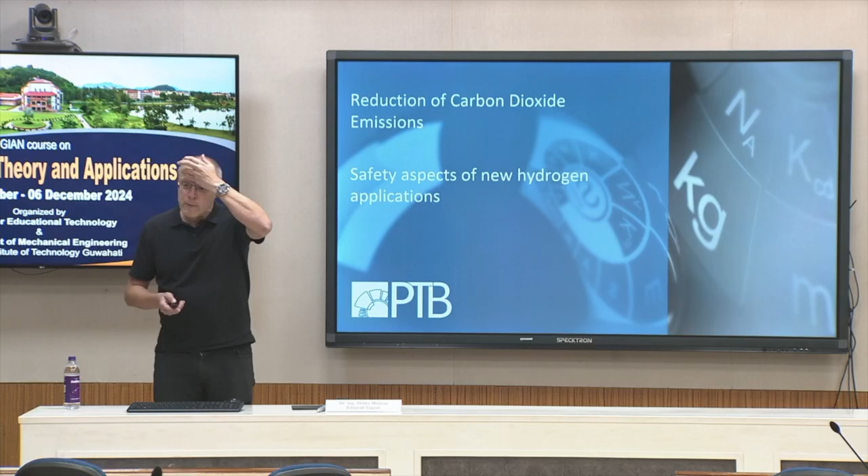In our today's session, we will leave the theoretical part of our lecture and will apply all the fundamentals we have learned in the last 7 days for some aspects. We will hear something from Professor Zahu about applications, and I will focus also on applications. So I will start today with the great goal, reduction of carbon dioxide emissions, and we will have one lecture about safety aspects of new hydrogen applications.

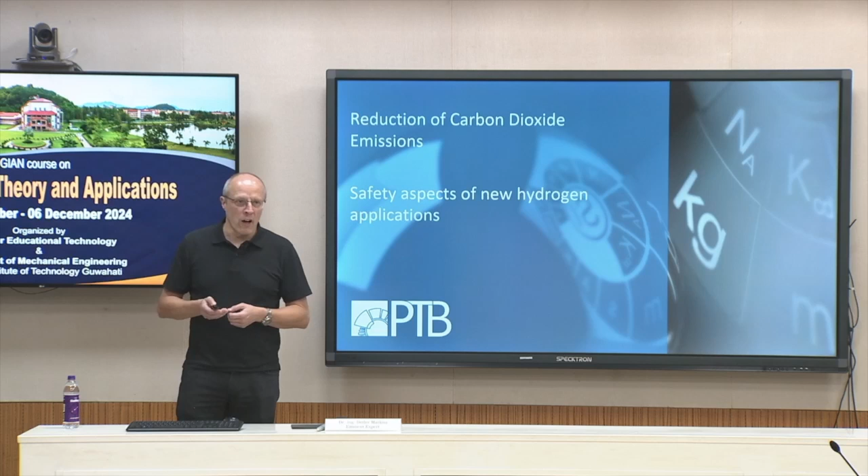So what is the demand if we really want to have a hydrogen economy instead of an economy based on fossil fuels? And I think eventually on Friday, depending on how fast we are, we will also discuss this topic, reduction of carbon dioxide emissions. So we may get rid of carbon dioxide, but if we still use combustion for energy production, of course there are other pollutants, and this then has to be discussed.

So for the motivation, okay, we have a climate change. This cannot be neglected. Maybe on Friday we'll discuss, is it man-made or is it natural climate change? So the dinosaurs lived in an era where we had no ice in polar regions, so it was much hotter on Earth at specific times.

But of course, there is a strong relation between the emission of greenhouse gases and global warming. And so the actual change in temperature globally is based on the emission of greenhouse gases. And this is not only carbon dioxide. Of course, this here you see has the biggest contribution. But there are also other emissions from agriculture, especially methane, which has a high global warming potential. Agriculture has a big contribution here. So all the cows in Brazil produce a lot of methane,

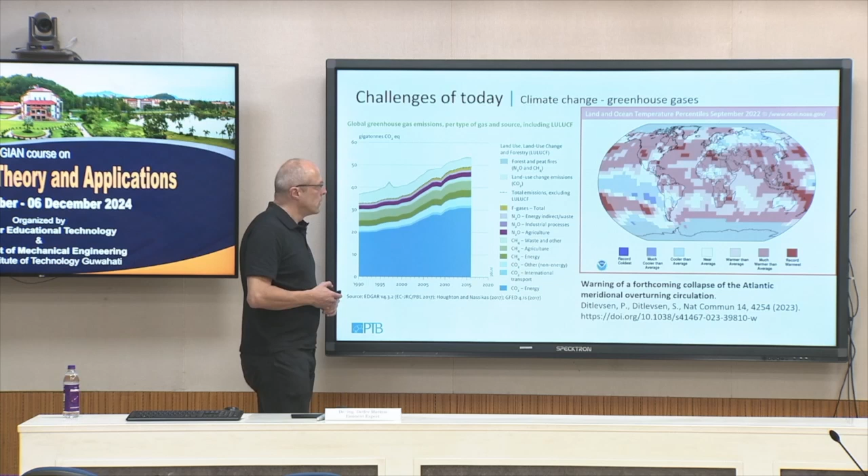which then of course absorbs radiation. We have here nitrous oxide, mainly from agriculture nowadays. But if we switch to an ammonia economy, this can change, of course. We can have much more emissions here. And here we have the F gases, hydrofluorocarbons. These are most often refrigerants, so used in our air conditioning systems.

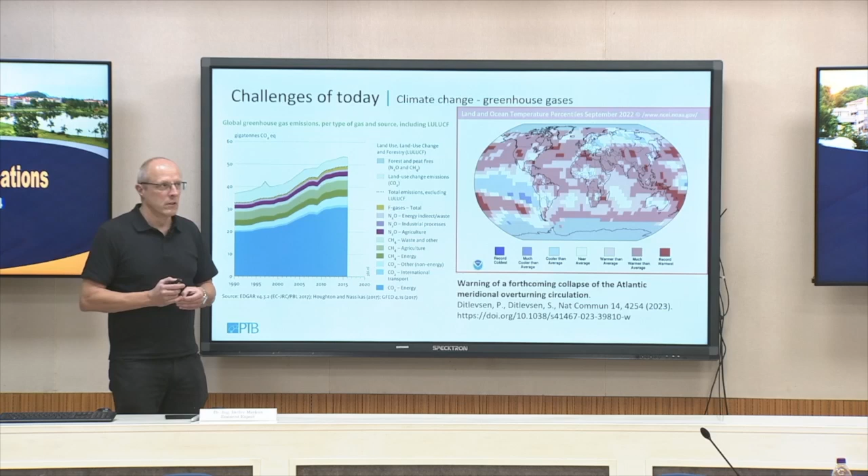They were introduced to replace the older refrigerants we had in the past, where we had some problems with ozone depletion. Now we have some refrigerants which have a high global warming potential. And there's of course a ban on these gases, but when we look at the worldwide demand for cooling systems, the demand here will strongly increase. And the question is, will the contribution of these gases to the greenhouse emissions also increase or not?

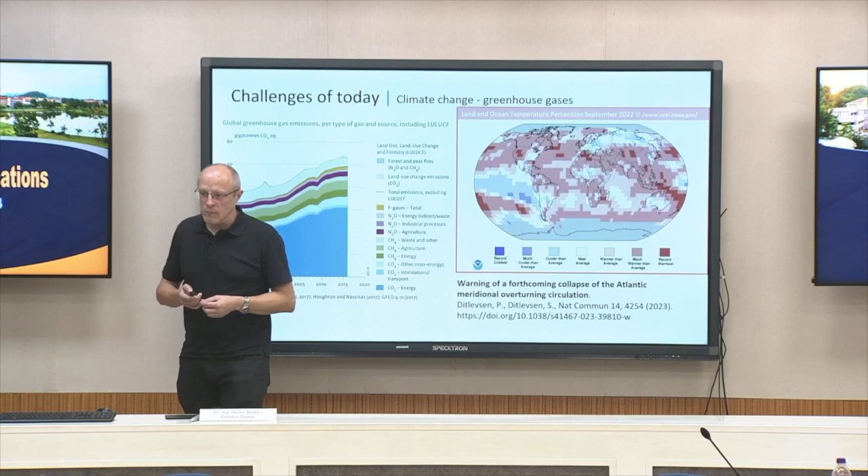So the world has the aim to stop this global warming at 1.5. I think this is no longer possible. So the next aim is then 2 degrees Celsius, but this is not the main problem. Here we talk about global warming. When we look at specific areas, the temperature changes look totally different. In Germany, we now have much more strong rain events, short-time very, very heavy rains, which were seldom in the past. And here in India, maybe you have faced long hot summers with periods over 40 degrees Celsius for a longer time, at least in specific areas.

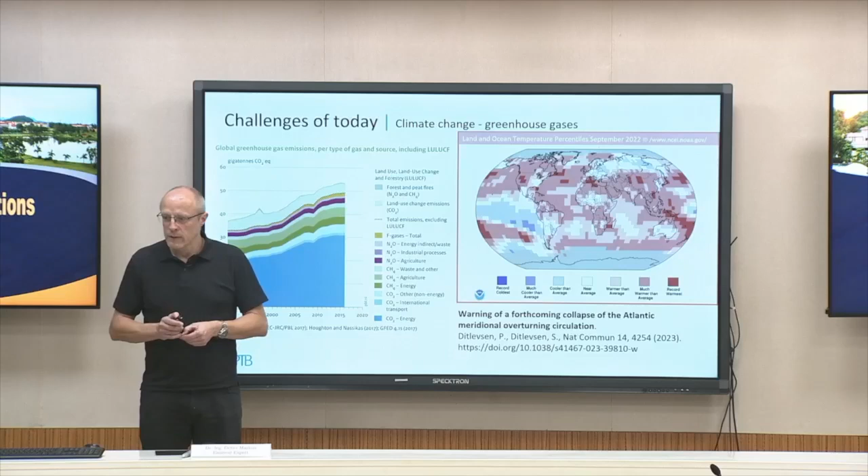So the problem of plus 2 degrees is not in the focus here. The local climate change produces more problems. So there are several agreements worldwide. The idea is to change towards climate neutrality and sustainability. So we have a framework of circular economy and methods for reducing greenhouse gases. In the European Union, we talk about the Green Deal. There are also similar programs here in India. So you have your own strategy for how to become carbon neutral until 2050, which is the global aim. One possibility, of course, is to use energy from renewable sources: solar, wind power, hydro mainly, biomass maybe.

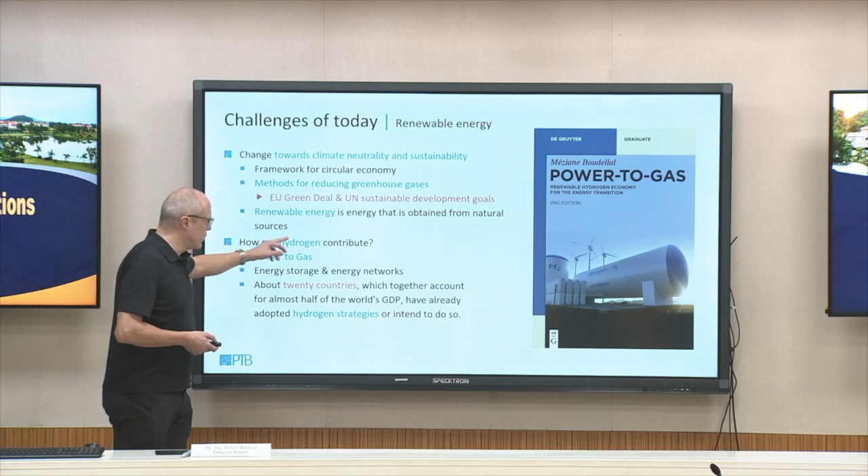So then, okay, here we don't have the word hydrogen included. So how can hydrogen contribute? The disadvantage of electricity is that we can store it only with difficulty or with high costs. There are some trends now to produce larger battery storage systems. But when we look at the need we have for all energy sectors, this will be difficult.

And the actual idea is to convert the electrical energy, in countries where we can produce it very cheaply, into hydrogen from renewable sources, so-called green hydrogen, and then transport either the hydrogen directly or transfer it to ammonia, methanol, methane, species which we can handle more easily, and ship the energy in this form into the countries with higher demand. So 20 countries already have a hydrogen strategy.

This is one of the possible ways how to reach a goal of carbon neutrality. So I will talk today in this lecture about safe handling of hydrogen. Hydrogen is not a new gas, of course. We know it for a long time and we have possibilities to handle it safely.

But what are the challenges if we really implement a hydrogen economy? So if we can have access to hydrogen everywhere, go to our fuel station, which is then a hydrogen station, to refill our car or truck, so that not only qualified personnel come in contact with hydrogen, every one of us may handle hydrogen.

So the background here is, of course, new processes need new safety concepts. Safer production, storage, distribution, and use of hydrogen in all application sectors is necessary. And this, of course, needs some research, and this will be discussed in today's lecture.

The safe handling of hydrogen in the process industry is based mainly on safety characteristic data, which describes the safety issues of hydrogen. This topic we will discuss more in detail with all the background in the next lecture. And of course, we have to talk about explosion protection.

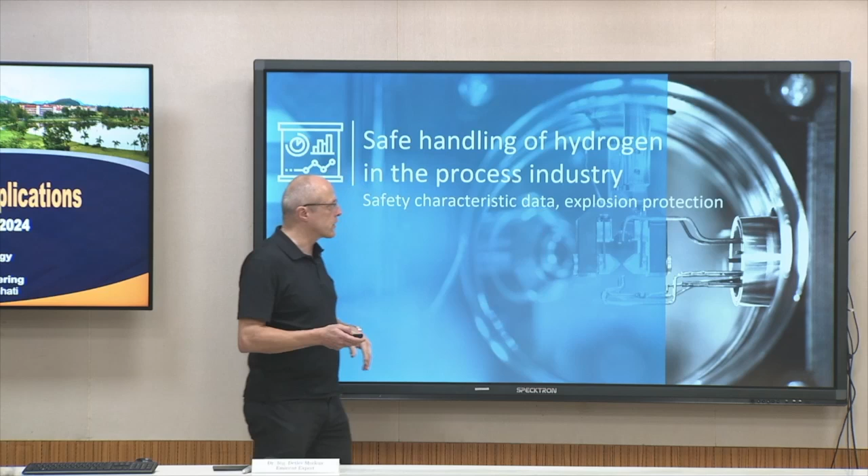So here a classical example. Hydrogen is a light gas, so it was used in balloons. You may all know the Hindenburg disaster, 1937 in the US, where one large zeppelin filled with hydrogen was burning, with a lot of fatalities.

Here we see an example. This is a balloon from the US military filled with hydrogen, and it's written here that it was ignited by static caused by soldiers' hair brushing against the balloon. Everyone knows it. When you take a plastic balloon and brush it at your hair, you produce static electricity.

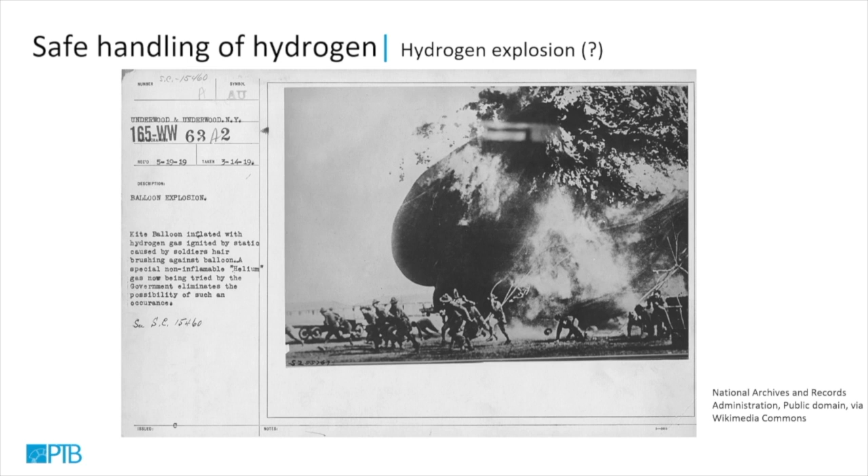And for hydrogen, the minimum ignition energy is 17 microjoules. This energy you would not feel on your skin. And you may know, on dry days, if you don't have proper shoes and you come in contact with the door handle, you feel the static electricity. And this spark will always ignite hydrogen-air mixtures. So the energy needed to ignite this is quite low, and here it was just an unfortunate soldier with his hair coming in contact with the balloon.

So hydrogen is not a new gas, of course. We have around 120 megatons of hydrogen, so it's one of the most important chemical substances we have. But actually, it's mainly made from fossil sources, so natural gas, coal, and oil, using the steam reforming process. Only 4% comes from electrolysis, and from this, we assume 33% global average renewable share. In 2021, 1% of the hydrogen was green. 99% was still based on fossil fuels.

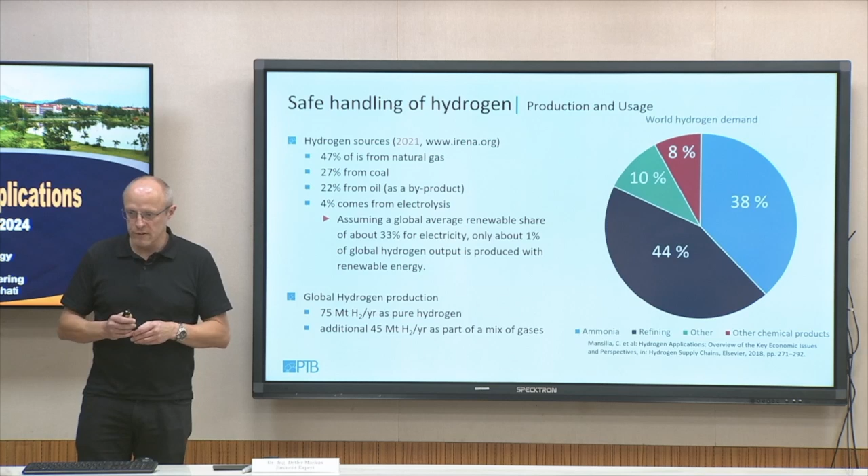So where do we use it today? We have two main factors. Refining in the oil industry: we need it for proper handling of the crude oil to get finally the gasoline, the diesel, kerosene, whatever we need. And there is also big demand for ammonia production using the Haber-Bosch process. Nitrogen from the air plus hydrogen gives us ammonia, and this we use for explosives and mainly for fertilizers. Then we have other demand in the chemical industry, but these are the two main parts, and actually 120 megatons of hydrogen.

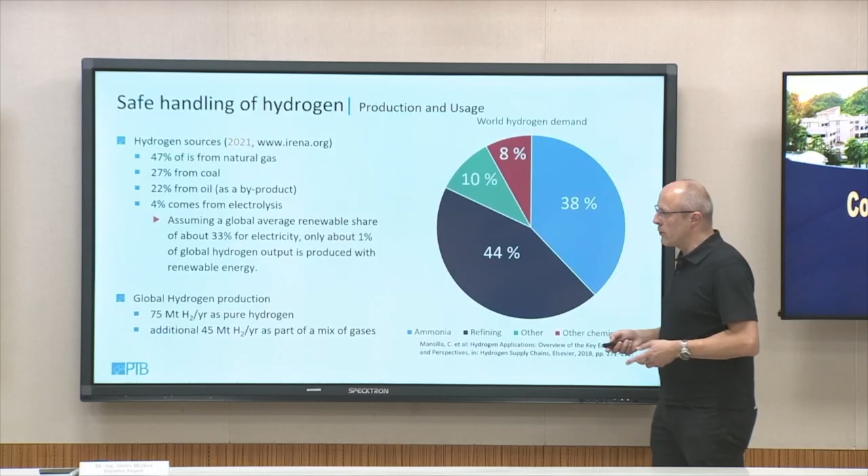And I'm not aware of any accidents with respect to hydrogen in the last 50 years here at BASF. Accidents with hydrogen occur, of course, but they are quite seldom, especially in the bigger chemical complexes, because we have a strong regulation here in Europe. We have the so-called ATEX directives, which deal with safety at work mainly. The existing regulations fully cover hydrogen, so there is no demand for any new or stricter regulation.

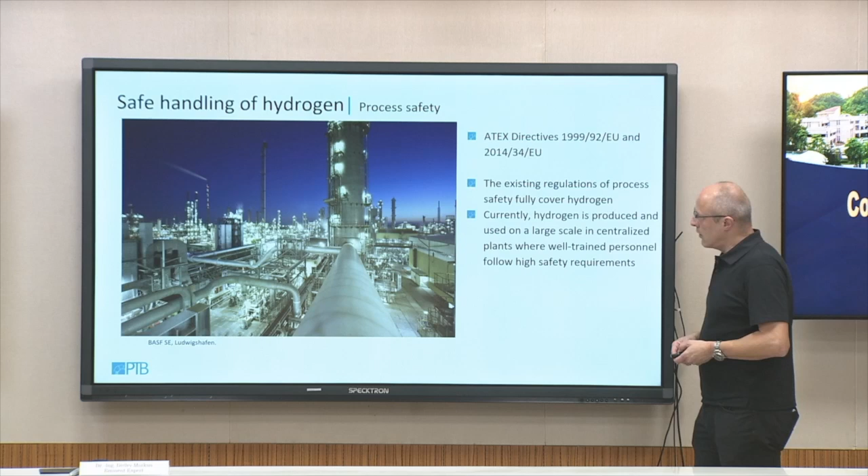But we also have to know that hydrogen is produced in closed areas where only well-trained personnel has access. The experts here know how to handle this and are aware of the danger when you deal with hydrogen.

This we will also discuss more in detail in the next lecture, but when we consider explosion protection, we have a combustible, we have a heat source as an ignition source, and we have an oxidizer, mainly oxygen from air. And if we have this in proper composition, then an explosion may occur. So we have several measures to avoid this.

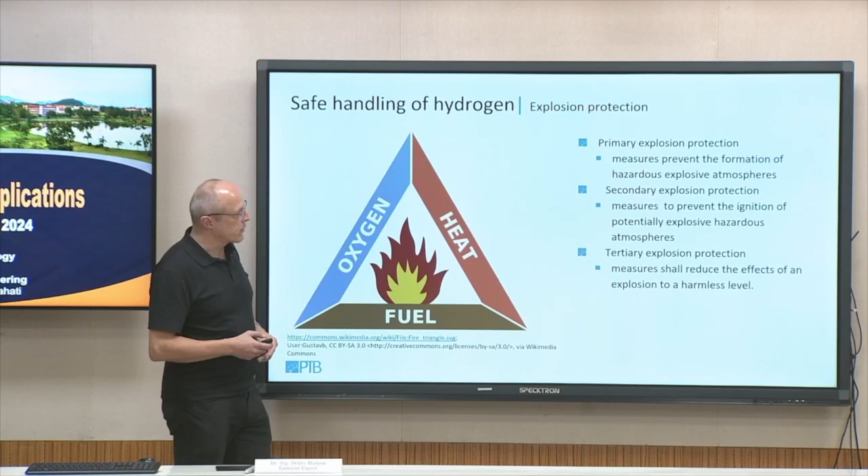First of all, we want to avoid the formation of a hazardous explosive atmosphere. That means here we try to limit this. Secondary explosion protection is we want to avoid an ignition source, so we focus more on this part. And tertiary explosion protection: we want to reduce the effects of an explosion, using, for example, flame arresters and so on.

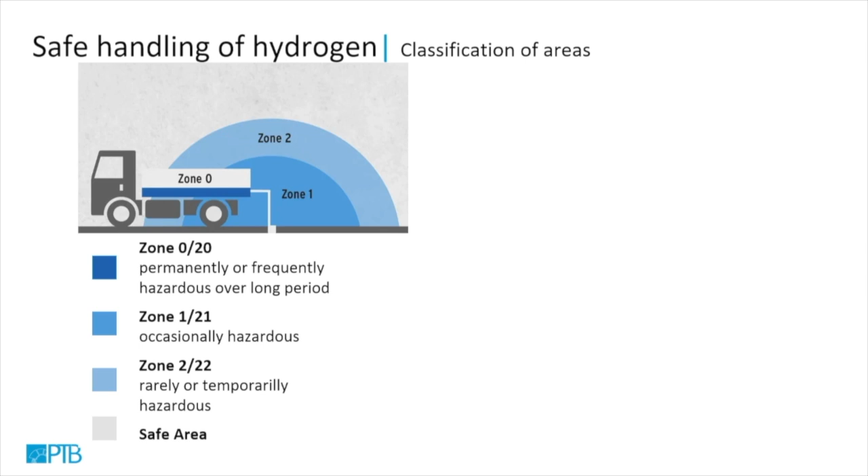So we have a classical classification of areas here to handle the danger properly. We have a zone 0 for flammable gases and liquids, and 20 for flammable dust. In zone 0, 20 we have permanently or frequently hazardous over a long period. And then this probability reduces, so we have a zone 1 where it's occasionally hazardous, and a zone 2 where we have seldom hazardous atmospheres.

And here we see in draft sketch, here we have our tanker. Inside this we have a zone 0, there's nearly always a hazardous atmosphere. And then near the filling station here, we may have a zone 1, and then at some distance a zone 2. And then you need to use proper equipment in these areas.

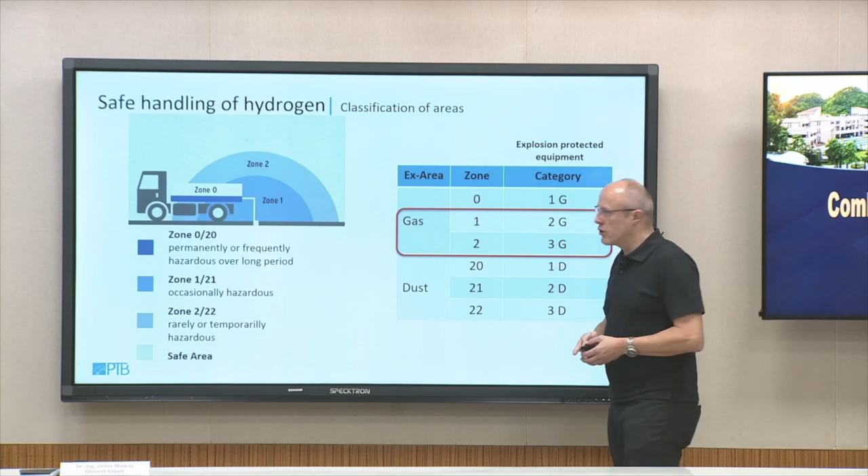So these have to be tested by notified bodies, and we have different categories here. For hydrogen, mainly we talk about these two zones, zone 1 and 2, because it's quite expensive to have electrical equipment in a zone 0, especially when you deal with hydrogen.

So how do we classify then the gases we have? We have 2 explosion groups, or 3, sorry, now 3. The first one is mining only, so we have specific safety requirements for mining area. Then we have explosion group 3, where we talk about dust. And the focus today here in this part is, of course, group 2, which we divide into 3 groups, 2A, 2B, 2C.

This is done, for example, with the maximum experimental safe gap, which is quite large for 2A and much smaller for group C. So we will discuss this topic today in the afternoon or tomorrow more in detail, to give you all the background here.

Maybe easier to understand is here the minimum ignition energy, which we also can use to separate the gases. Gases of group 2A, as an example, propane has a quite high minimum ignition energy of 0.2 millijoules, and this goes down to group 2C, hydrogen and acetylene, where we have ignition energies below 0.05 millijoule.

And just as an example, ammonia has a minimum ignition energy of 14 millijoule, so it has nearly 100 times this value. But nevertheless, it can be ignited and can burn, ammonia in air.

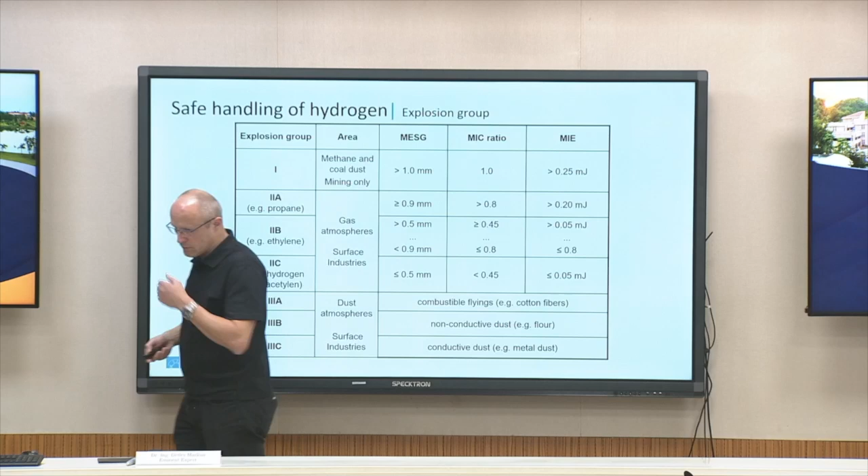What is the idea behind this? The gases, or the combustibles, which can come in contact with our equipment here have an ignition temperature, an auto ignition temperature - again this we will discuss later. And of course, different gases or combustibles have different ignition temperatures.

And interestingly, the ignition temperature of hydrogen is quite high - 595 degrees Celsius, I have to check literature again. So it has a really, really low minimum ignition energy, but the ignition temperature is quite high. So this is a big advantage here if you want to handle hydrogen.

So we characterize combustibles with safety characteristic data - again, this we will discuss more in detail later. First of all, they are not material constants like boiling point, but they give us quantitative information about material properties. So as we have seen, group 2A, 2B, 2C - we know group 2A combustibles are safer, easier to handle than group C combustibles.

They are not independent of the determination method. You will see differences when you look in literature. Minimum ignition energy for hydrogen in Europe maybe is tabulated differently compared to minimum ignition energy here in India. You may find other values, but you are always in the same range.

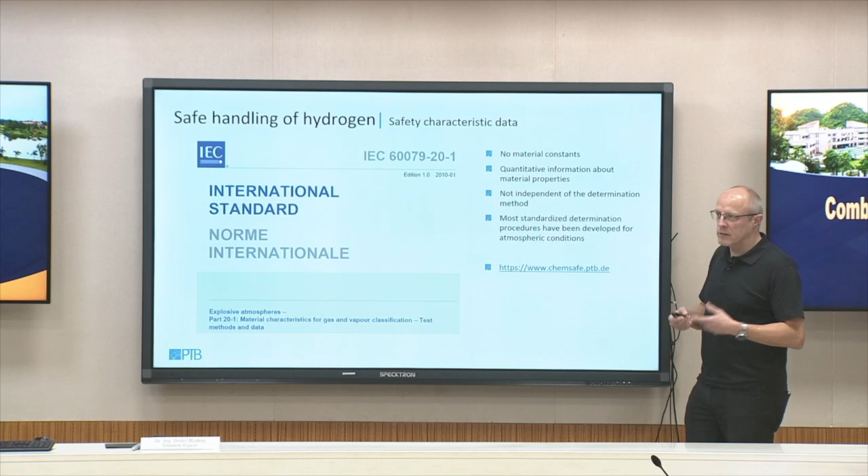The main problem is, again, we're talking about safety at work. Most of the data we have is for atmospheric conditions - minus 20 to plus 60 degrees Celsius and 800 to 1100 millibar. So if we are out of this atmospheric condition, we cannot use the existing data to discuss safety topics. We have to measure them or to yield them again.

Here's the ternary diagram of the explosion region of hydrogen, with inert gas nitrogen here, and oxygen here. The idea is we can determine the exact mixture composition of oxidizer, inert gas, and flammable gas at every position in this diagram. Hydrogen has a lower flammability limit of around 4% and an upper limit of around 78%. These are the flammability limits in air and in oxygen.

And then here we see this curve. If we add nitrogen to this mixture, we strongly change the upper flammability limit, while the lower flammability limit more or less stays constant. Mixture compositions inside this region are explosive and combustible, and mixtures outside are not combustible.

There's one interesting effect: the lower flammability limit of 4% is quite low. We can see this when we calculate the laminar burning velocities of hydrogen. Below 10% hydrogen, we nearly reach zero. Nevertheless, the flammability limit here is around 4%.

We have here, for example, diffusive preferential diffusion effects. The hydrogen is moving towards the hot flame, so inside the flammable region, there we have locally higher hydrogen concentrations. Hydrogen is a light molecule, diffuses very fast. This strongly supports the combustion process.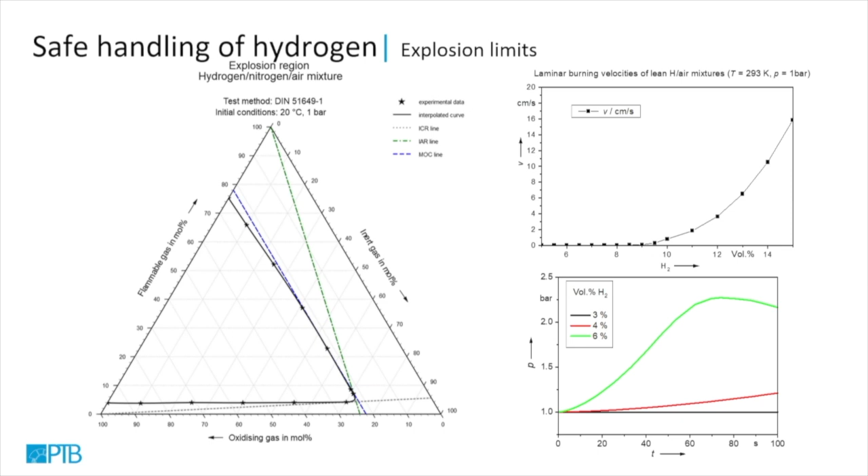This can be seen when, for example, we measure the pressure after ignition in a closed vessel. With 3%, there is no pressure rise. This maybe was ignited by a spark, but no self-sustaining flame propagation could be observed. With 4%, some reactions occur. But if we already have 6%, we already have an explosion pressure of around 2.2 bar. Here, of course, we already have strong reactions. I will discuss this later with one slide more in detail.

Minimum ignition energy, I said to you, is 17 microjoules, very low. But here we have to consider that if we have a richer or leaner mixture, the energy needed to ignite the mixtures is much higher. And when we talk about the 17 microjoules, this means that in 1 of 100 experiments, such a spark has ignited hydrogen. So we are talking about an ignition probability which is quite low, giving this low value.

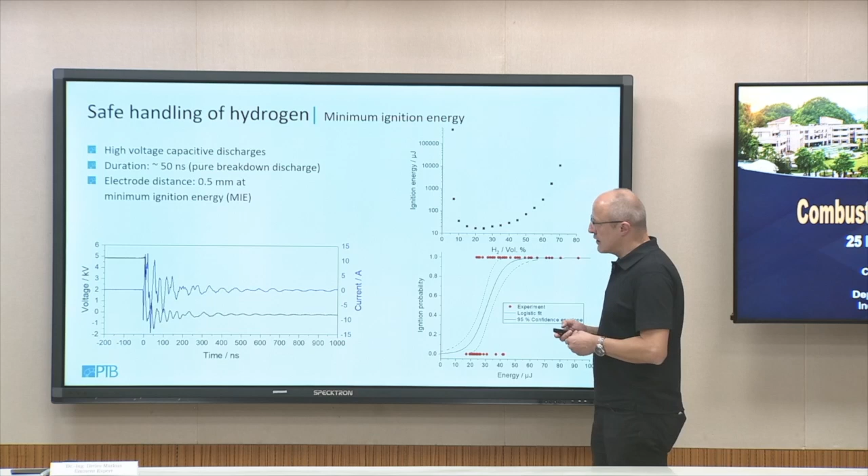One important topic for hydrogen: here you see this classical probability curve we use when we perform ignition experiments. We see an ignition or we see not an ignition. So even if we use the same energy, it can happen that it ignites or it does not ignite. For classical hydrocarbons this normally covers a broad range with respect to energy, and this range is very small in the case of hydrogen. So hydrogen is really interested in getting ignited and starting combustion.

Let's see if these videos are working. Here we ignite hydrogen between two sparks, or between two electrodes, and what you see is that after the ignition, all four videos more or less look identical.

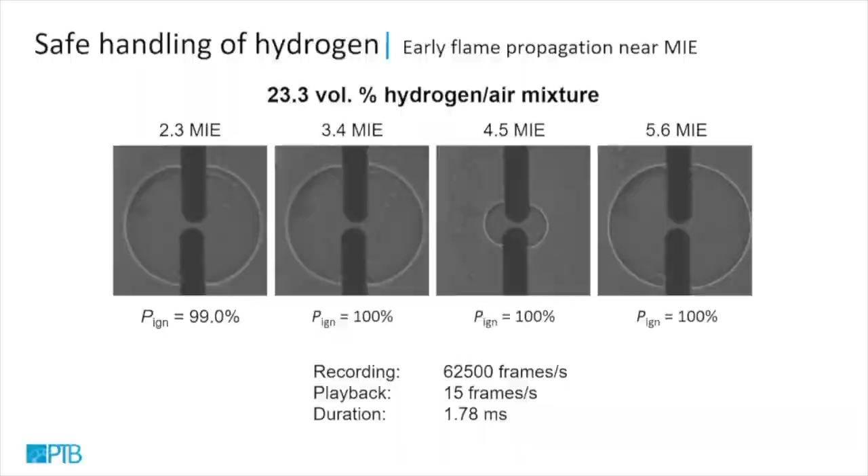Here we have varied the ignition energy, from 2.3 up to 5.6 times the minimum ignition energy, so we are already in a range of 99% ignition probability, which is quite high. When we look at it in detail, you can see that the lighter one seems to be faster compared to this one here, reaching the outer boundary of the video at earlier times.

But it's not faster, we just have deposited more energy into the system, so the initial kernel is a little bit larger. The ignition occurs more or less at the same time, and then we yield constant flame propagation with a constant flame velocity. We have performed the experiment several times for specific energies, and you see only small deviations. It's a very stable process, and the difference here comes from the different energies we need, but there was no difference in ignition delay time.

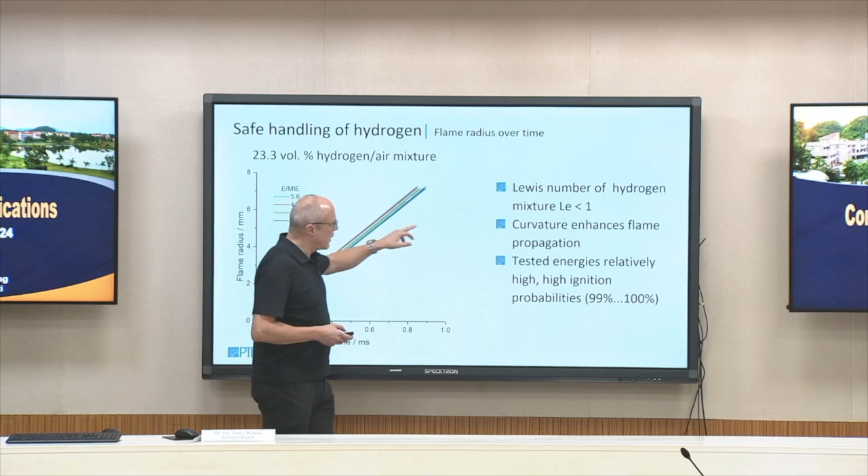An interesting effect here is we have a mixture of 23% hydrogen. It's a lean mixture, and this is the most ignitable mixture. Here the Lewis number of hydrogen is smaller than 1, meaning again the hydrogen is moving towards the hot zone due to diffusion. So when we deposit the electrical energy and start the combustion process, it is moving towards that zone.

Another important topic is that we have strong curvature at the beginning, a very small ignition volume with strong curvature. In the case of hydrogen, this enhances the flame propagation, so if we ignite it properly, we will always see that it develops into a bigger flame ball.

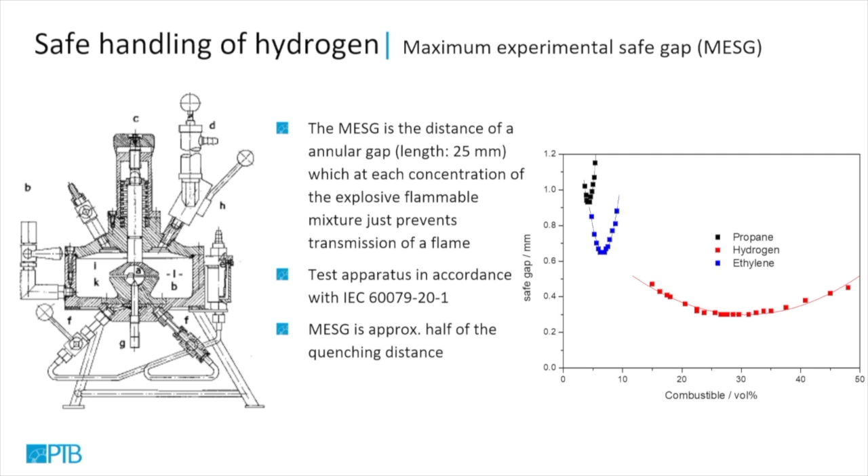Then we have this maximum experimental safe gap, which I will explain in the next lecture in more detail. But you see here, hydrogen has a broad explosion region compared to the other gases, and of course has much lower ignition energy.

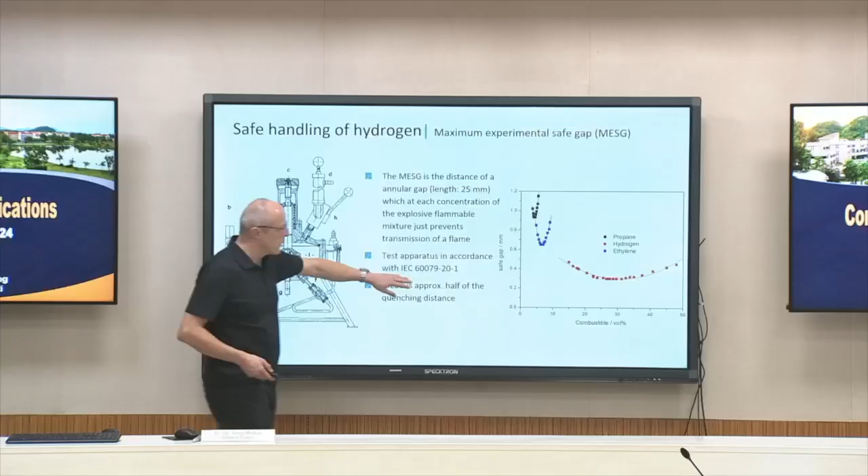Another nice aspect is based on ignition energy, which means safe gap. Safe gap means the flame has to move from this volume to the outer volume, and the width of this gap depends on whether there is a flame transmission or not. In case of hydrogen, this can be much smaller than in case of other combustibles.

Yes, wherever you want. Thank you. So...

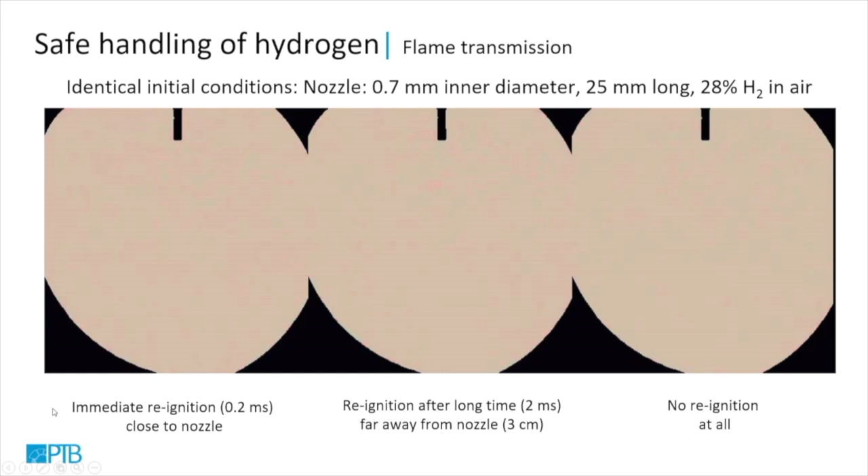We have identical configurations, but in this case it ignites directly at the nozzle. Here it takes some time to reignite, much further downstream, and in the third case it does not ignite. So of course when we talk about turbulent flow, we have a lot of other statistics to consider, which then influences the ignition probability.

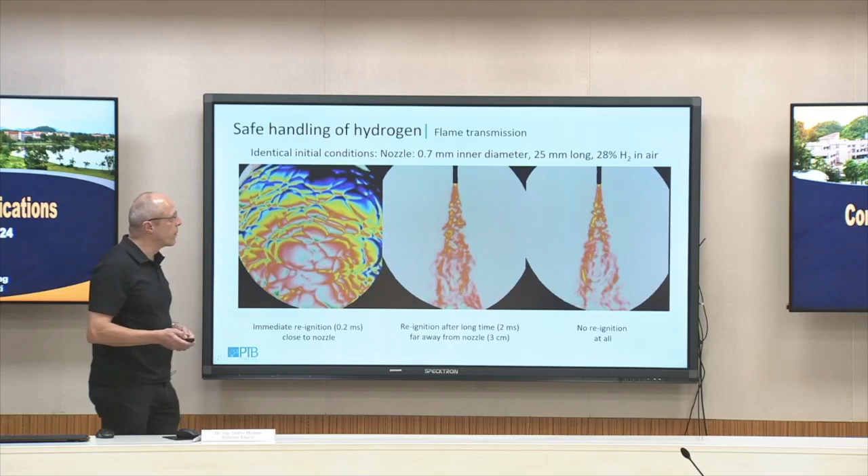Then we have to talk about explosion pressure. As we have seen yesterday, the adiabatic flame temperature of hydrogen is around 2100 K. When we look at the ideal gas law, the pressure change comes from the temperature change. We start at 300 K and reach 2100 K, so we have a factor of 7. We expect a pressure increase of a factor of 7, which matches here.

Normally we do these experiments in a sphere to determine the maximum explosion pressure. The explosion is in the center of the sphere, and we have a spherical flame propagation. Any wall effects can be seen very late only, so we yield the maximum pressure, and then we have cooling at the walls and so on.

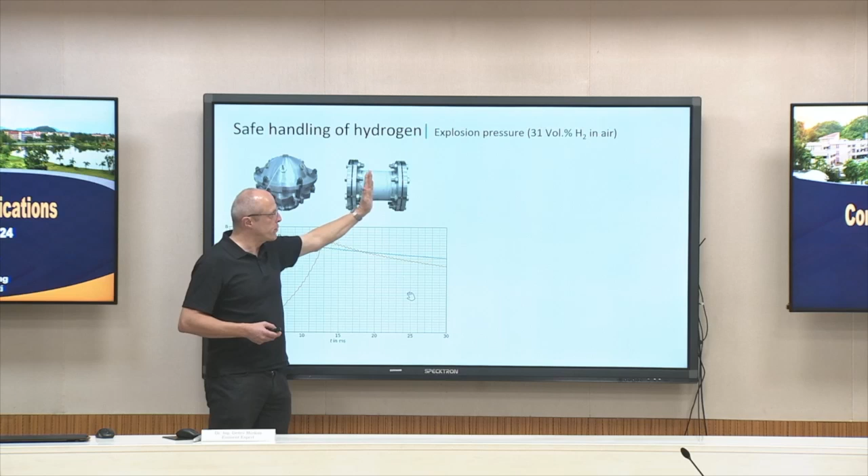When we perform such an experiment in a cylinder where we ignite at one end, we see a different pressure curve as a function of time. But you see we nearly reach the same maximum pressure. The cooling effects, due to the fact that the flame has to propagate in this way and we have a lot of wall contact, are nearly neglectable. So hydrogen burns so fast that the cooling for this configuration is not of interest.

But what happens if we have more complex geometries? Here we have, for example, two tubes, and between these two tubes we have an orifice. We ignite here, and we have measured the pressure in both vessels. In this vessel, when we ignite here, we see more or less the same pressure as a function of time.

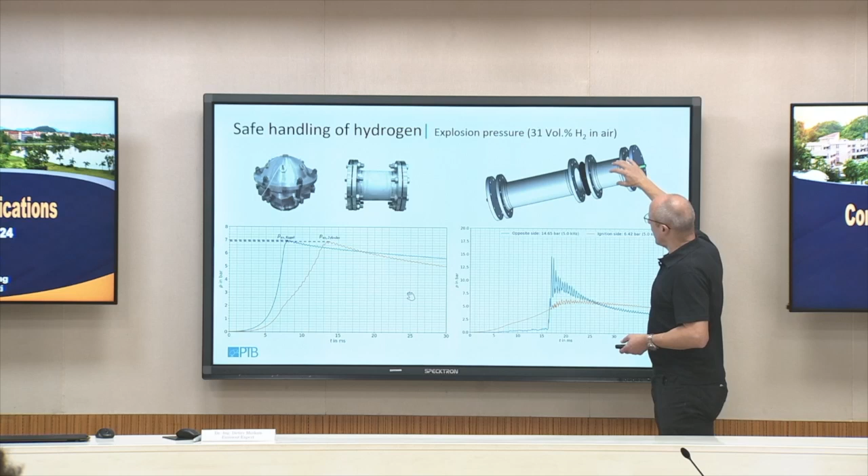But what is happening? We ignite the mixture here, temperature increases, pressure increases. With this expanding flame, the pressure is increasing until the flame reaches this nozzle. And there is a given pressure difference of maybe, in this case, nearly 4 to 5 bar. And this pressure difference means we have an acceleration of the hot gas into the second chamber.

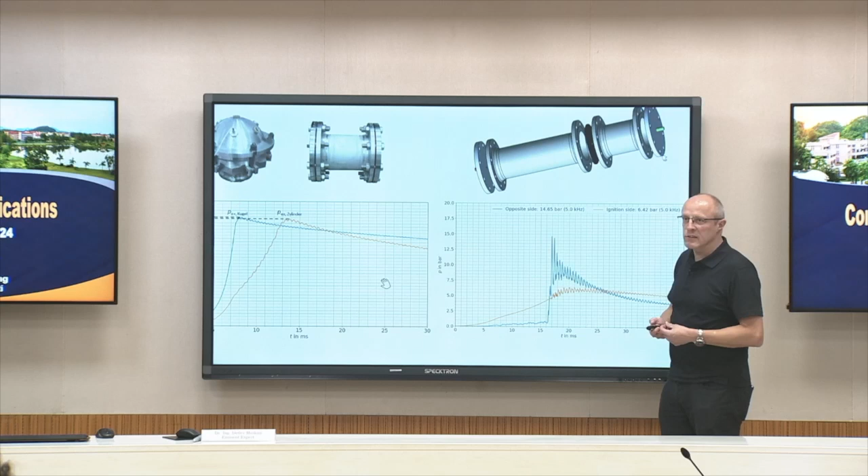So we get a large turbulent jet. This we have also seen yesterday. And then, of course, we have very fast combustion due to the turbulent flow we have. And in addition, we have ignition in a very large volume. So the combustion here is very, very fast.

That means we start at higher pressures due to the fact that the slow combustion process here already moved a lot of gas into the second chamber. And the combustion here is so fast that there is no pressure relief to the first chamber. So we reach much higher pressure. In this example, nearly 15 bar, but with proper configuration we reach 35 bar. And in complex test samples, in our test field, we also have reached 100 bar.

And we assume we have not had a detonation here. It's always the so-called pressure piling. We increase the pressure before ignition, so we start at a higher initial pressure and reach also a higher end pressure. And then here we see some sound waves. This we do not have to discuss.

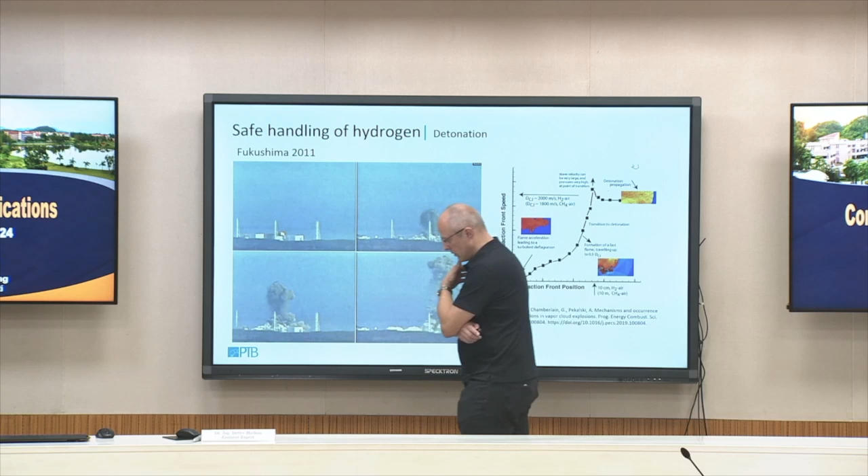Detonation. You may know this accident from Fukushima, 2011, where after a tsunami several accidents occurred in a nuclear facility. After the flooding, hydrogen was produced inside the nuclear reactor, and after an ignition of this hydrogen, heavy explosions were visible, so detonation has occurred.

And the problem here is that a detonation does not appear instantaneously. After ignition, we first have a deflagration, and then it needs proper conditions to get a detonation. For methane, for example, it takes around 10 meters after ignition until we may reach proper conditions for detonation. So the flame has to develop for a very long time and should not be disturbed. In case of hydrogen, we talk about 10 centimeters.

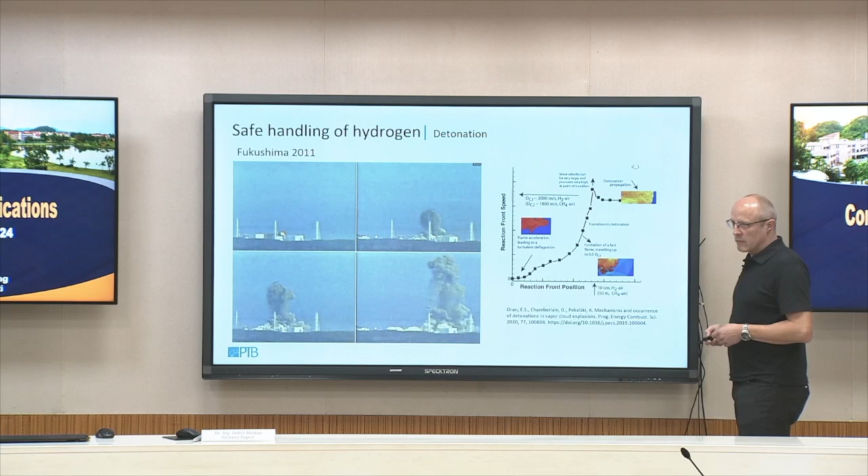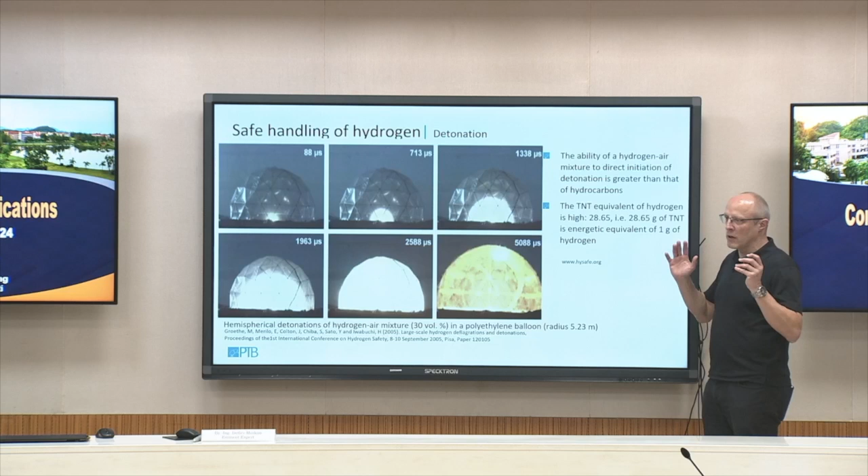And so we see already a detonation for this example, which is quite seldom for hydrocarbons. So hydrocarbons and detonations, we are talking normally about pipes. We need something like a confined equipment where we can get this detonation. The only example I know is Buncefield disaster, where they also talk about detonation effects, and where we have had an unconfined hydrocarbon air explosion.

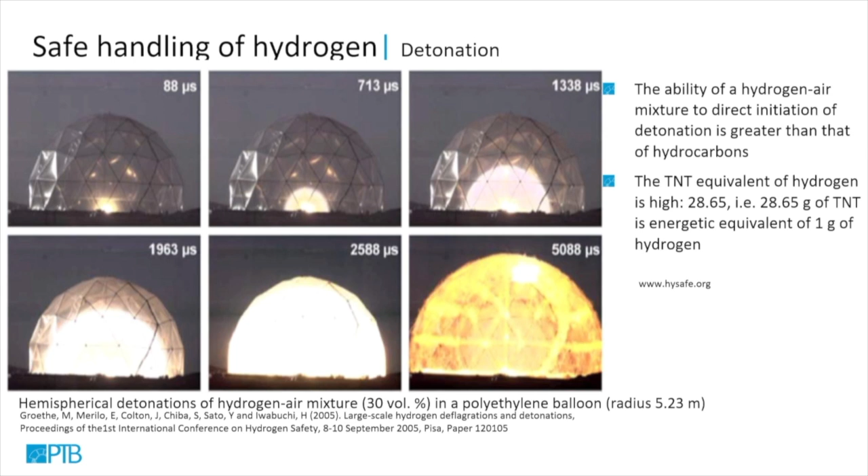One of the interesting parts is here the TNT equivalent is quite high. When we compare the strength of a hydrogen detonation with a TNT explosion, here we have a factor of 28.65. So 1 gram of hydrogen corresponds to 28.65 grams of TNT, which of course is a well-known explosive.

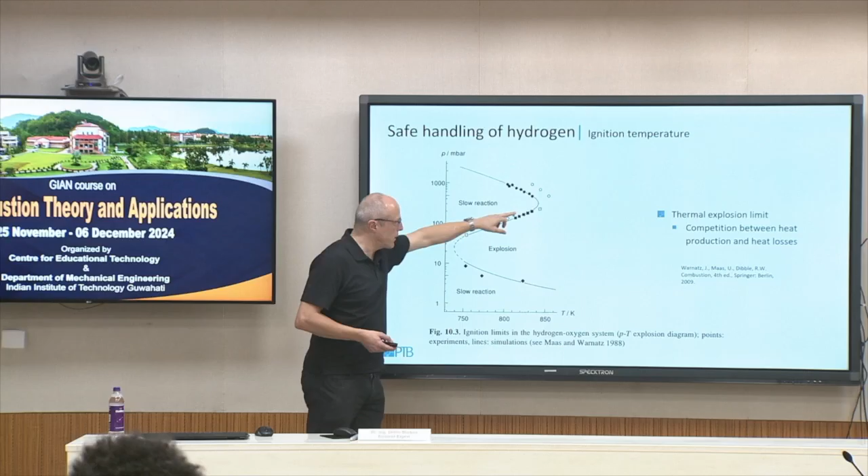So this curve we have already discussed in detail. So when we look at the ignition limits, here this classical limit curve, pressure and temperature, we have different kinetic and diffusion effects which we have discussed, and this is then the advantage of hydrogen. At around 1 bar we have a quite high ignition temperature. Here the kinetics helps us. So we have only slow reactions taking place here at these low temperatures.

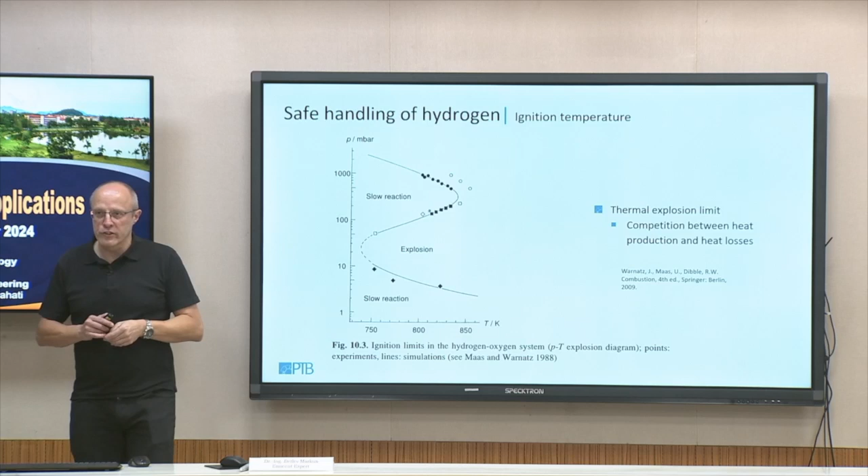So with HO2 and with H2O2, and so the prominent reaction H plus O2 giving OH plus O is important at much higher temperatures here in this region. So here that's the advantage of hydrogen. Even though we can ignite it very easily, the auto-ignition temperature is quite high at standard conditions.

Then we have to think about regulatory requirements. So if we use hydrogen everywhere, what has to be changed? Do we have a safe infrastructure for this? What is necessary for standardization and what is necessary for education and training?

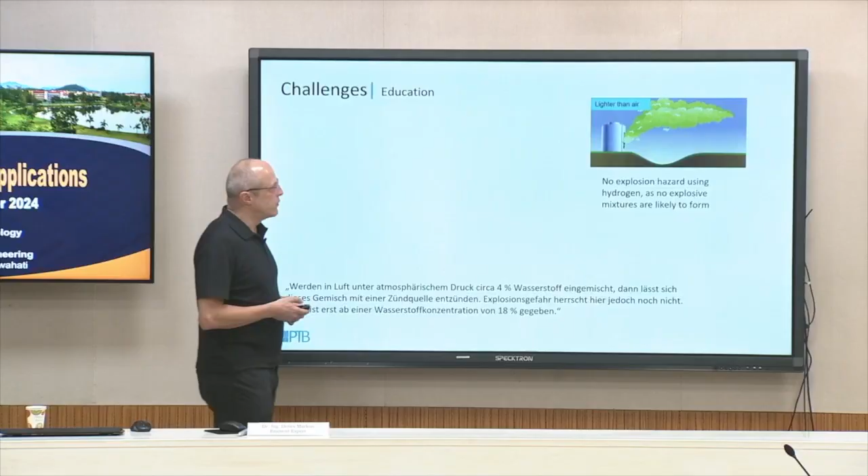I think they mean this is maybe the lower detonation limit. So mixtures below 18% may not detonate, but I think I have shown it to you. Maybe we'll see it later. Also, lean mixtures result in strong pressure rise. So this is totally wrong. Another very common opinion is hydrogen is much lighter than air. So if there is a leakage of hydrogen outside, we do not have to bother about this. It's going up, it vanishes, so everything is fine. This is of course also not correct.

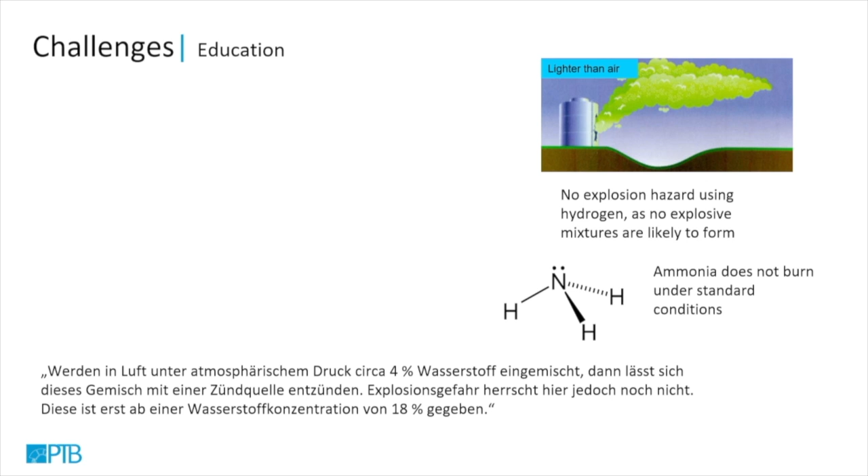Another statement from a ship manufacturer who does not want to deal with safety aspects was ammonia does not burn. So ammonia is a typical hydrogen carrier. So he wants just to save some money, and he just said, okay, under standard conditions, this does not burn. It has a minimum ignition energy, it has a flammability limit. So of course it burns under standard conditions, even though it burns quite slowly.

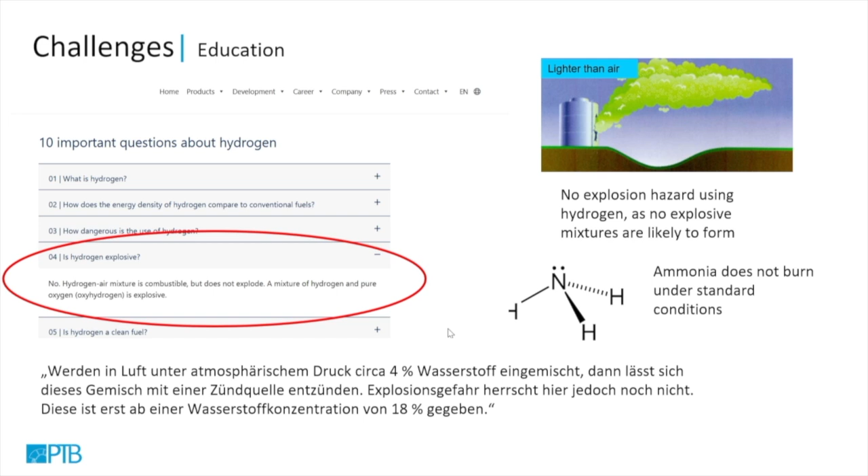And this is from a website from a manufacturer of hydrogen storage devices. So also someone who should have some experience. And there was written, so is hydrogen explosive? No. So hydrogen air mixture is combustible but does not explode. A mixture of hydrogen and pure oxygen is explosive. So you can write this on your website, but it's, I think, not correct, even though they should have some background here. So of course, here we have to take care that we have proper education, that we get rid of this nonsense.

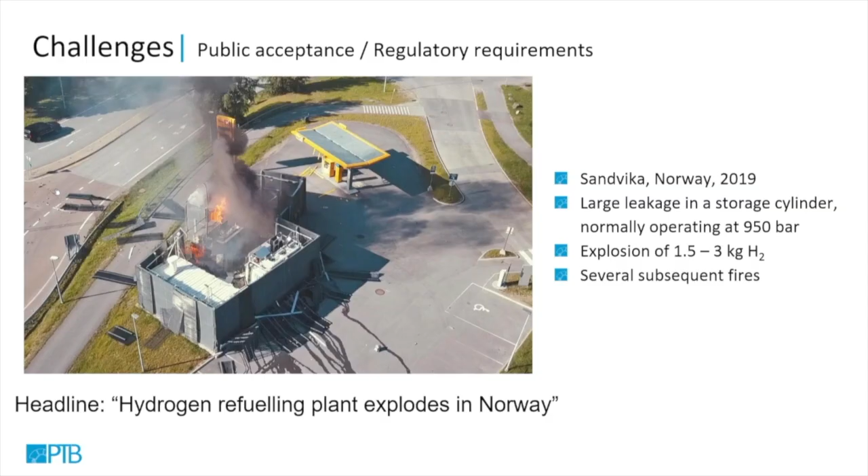Public acceptance. Here is a hydrogen station in Norway. There was an accident, so there was a rupture of a flange of the high pressure tank, sudden release of hydrogen, auto ignition event, a small explosion and some fire. And here we have a roundabout, and due to the explosion, some parts flew onto this bikeway, and in this roundabout I think one airbag opened, and therefore there was one injured person due to this airbag opening. So nothing more happened.

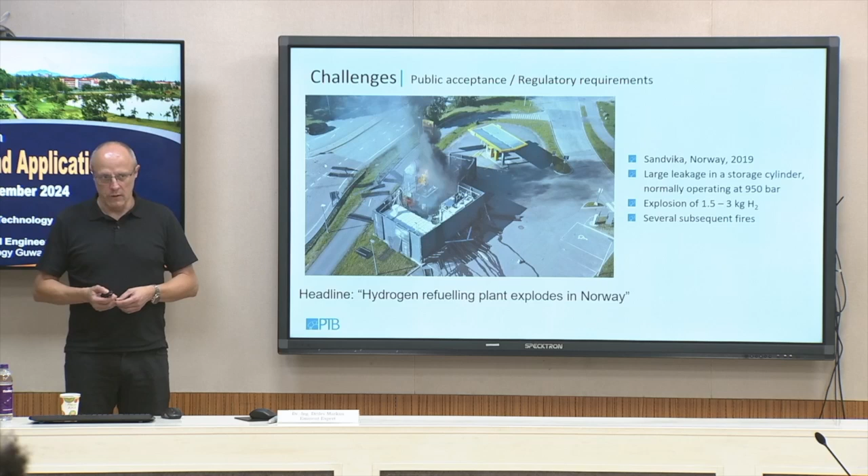But the outcome was that for a very long period, hydrogen stations in Norway were closed, and also some of this company in Germany. So if you have just bought a new fuel cell car, with demand for hydrogen, and suddenly there is no filling station, it's complex. And after analyzing this, I think there is a requirement in Norway that there is a given distance of several hundred meters from the filling station to the next building. So it's of course quite difficult to find a proper location when you need, for example, 500 meters minimum distance to the next building. So even though it was only a very small accident, the outcome was quite heavy. And this of course does not support change towards a hydrogen economy.

Regulatory requirements. I will not go into all the details, but the US, for example, with the existing president, this may change with the next one again, but they have had the Inflation Reduction Act, and they invested a lot of money into renewable energy usage, so that means also in hydrogen. So in total here, 370 billion US dollars.

In Europe, we have a lot of regulations. For example, we have a ban of combustion engines in cars, and here we have it for heavy-duty vehicles. So they should reduce their emissions by 90% by 2040, and city buses will have to be zero emission by 2030. So this is given by the EU regulation, and then no one knows how to handle this. Well, that's of course the typical way you have to deal with politicians. And then the next problem is there is no strict regulation.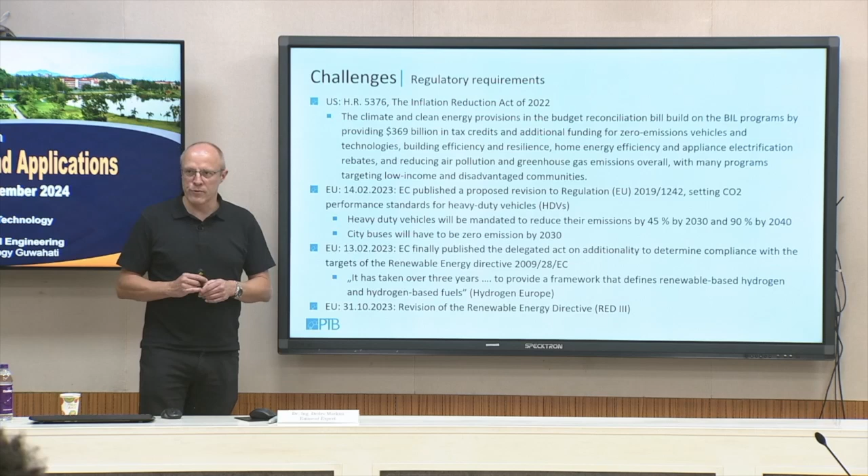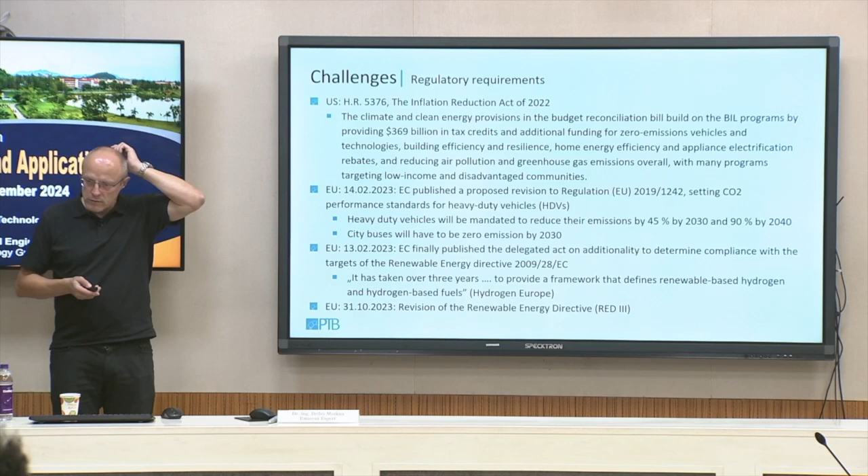In February 2023, after a very long time, finally the revision of the Renewable Energy Directive was published, which is of course necessary for manufacturers and end users so they know how to deal with this possible change towards a green economy. So it needed 3 years to provide a framework here in Europe which defines renewable-based hydrogen and hydrogen-based fuels. So of course here we have to be much faster. Otherwise, if we do not accelerate the regulatory requirements, it will be difficult to move towards a hydrogen economy.

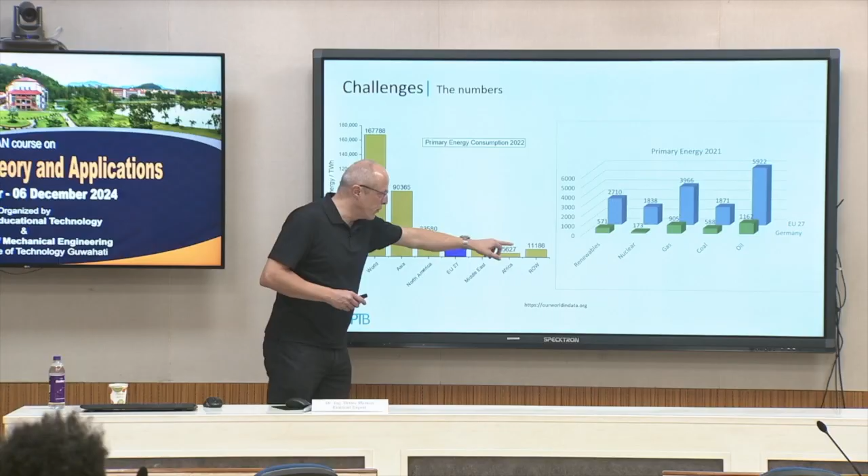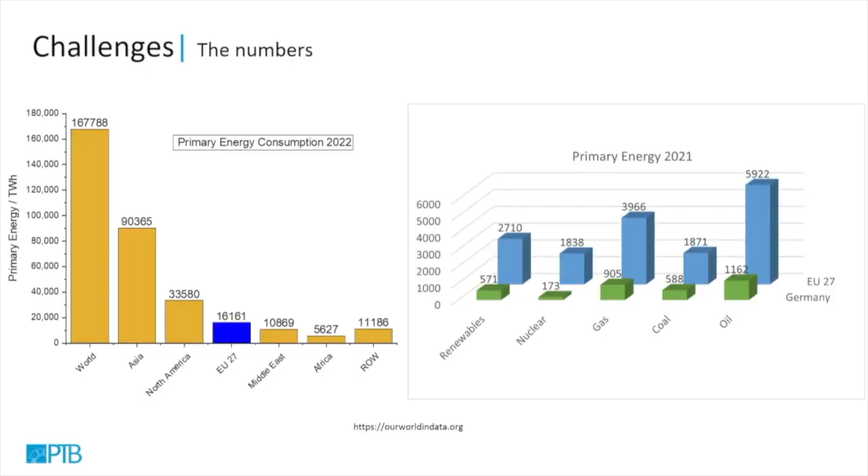But okay, what is the real problem? Here we have to talk about the numbers. The primary energy demand worldwide in 2022 was 170,000 terawatt hours, mainly here in Asia. 1.4 billion people living in India need, of course, some power. And the rest of the world also has a demand. When we look into Germany in 2021, here in green there was still some production from nuclear power, but compared with the other numbers it was already negligible at that time. And we have 905 in gas, 588 in coal, and nearly 1,200 in oil, but already 571 in renewables. And this is the total primary energy demand for all sectors.

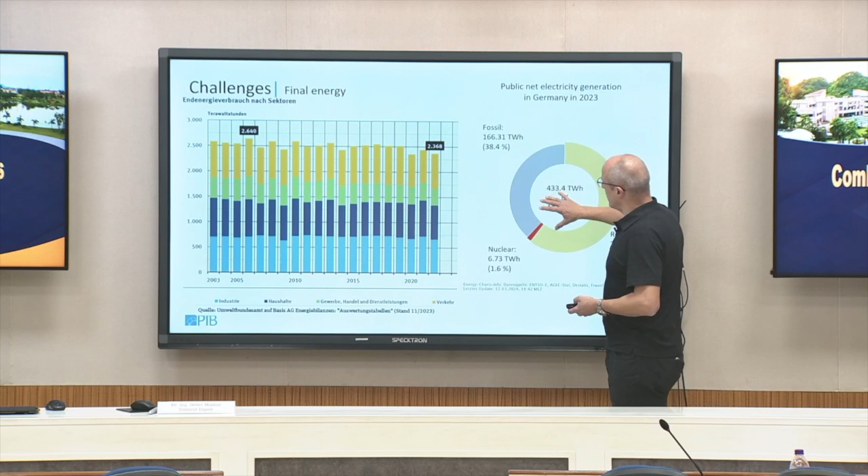Here we have the public net electricity generation in Germany in 2023. Still a number coming from nuclear energy, around 1.6%, and already 60% coming from renewables. And in northern Germany, we already have 75%. So it will be possible. Of course, we have to install more PV and wind parks, but this can be increased. Then we only have the problem of energy storage, because especially in winter, we won't yield these numbers at all times. So we need to import energy.

When we just make a rough assumption with the numbers, we need around 2,000 terawatt hours for net zero emission. That means this is approximately 60 megatons of hydrogen per year. To produce 1 megaton of hydrogen, we need 50 terawatt hours of renewable energy, assuming a 67% efficiency. So we talk around 3,000 terawatt hours. And that means, again assuming 5,000 hours per year working time for mainly the PV and wind parks, we need 600 gigawatts of electrolyzers.

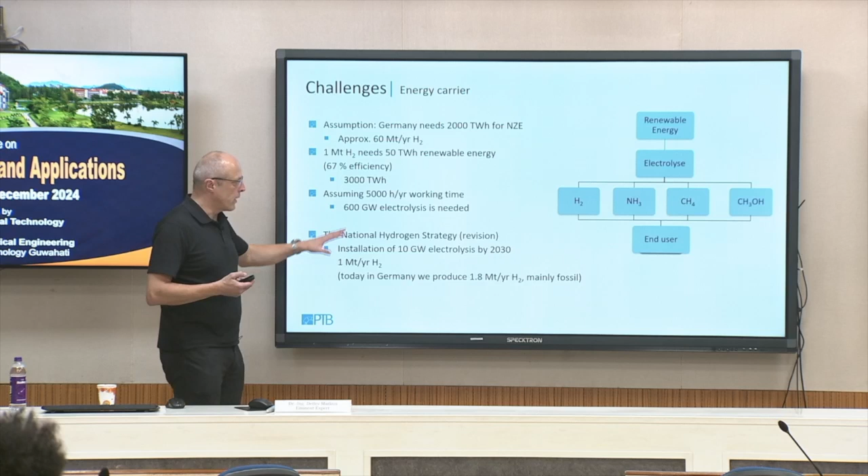So then when we look at our national hydrogen strategy, we are talking about an installation of 10 gigawatt in Germany. So we can, of course, use electrolyzers to store electrical energy, which we do not need at that specific time, in hydrogen, but we cannot fulfill the needs we have in Germany with all the renewable energy sources. So we always will have to import hydrogen.

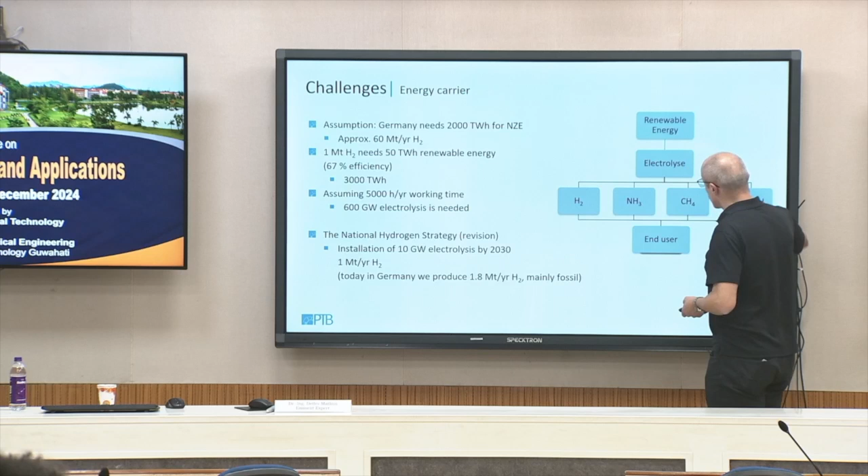Here we talk about 60 megatons per year. Just again, in comparison, actually we produce 1 megaton hydrogen in Germany per year, and this is in total 1.8 megatons. So this means there's, of course, a strong demand of energy carriers. And so we have this renewable energy, we have electrolyzers, and then we can produce hydrogen, and from this ammonia, methane, methanol, and this has to be transported to the end user.

So everything looks easy, but again, when we look at the numbers, maybe we will have until 2030 10 megatons production, 10 megatons per year import. So again, Germany needs around 60 megatons to reach net zero. So in 2030, there is only a small step achieved. The worldwide demand, of course, depending on different scenarios, is 500 to 800 megatons green hydrogen. And remember, actually we have 120 megatons, and only 1% of this is green. So from one megaton green, we want to go up to 800 megatons green.

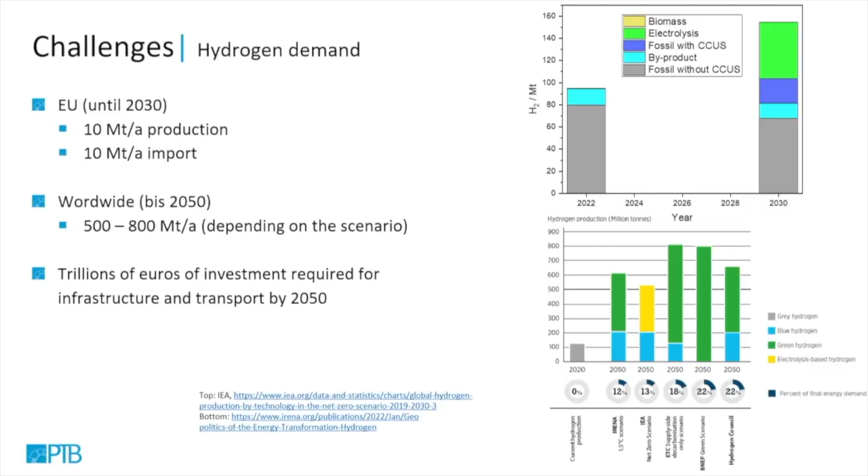So, of course, there are different possibilities, different scenarios, depending on different sources here. So actually everything is gray, and in 2050 everything is green, or we have green plus blue hydrogen. That means we use carbon capture, utilization, and storage. So this is a big step, of course. A lot of investment is necessary.

And when we look at this map here, we see that there are a lot of investments already going on in the world. So, okay, Europe, we want to produce around 10 megatons per year. And in Spain especially, there are a lot of plants already. I was in Tunisia and in Namibia, and we have plans with Colombia and Chile. So there's also big interest and some investments. And here, you may know this country, a lot is happening in India. You have your hydrogen strategy, and you install a lot of PV, which you may use for hydrogen production for export, in my opinion.

But then the question is, of course, we have to define the product requirements. We have to be sure that there is not a big coal plant producing electricity, and then this electricity is used to produce green hydrogen, which then is exported to Germany, for example. So this, of course, is critical. If you compare hydrogen from fossil sources with green hydrogen, you can see a difference in the molecular fingerprint. The ratio of protium to deuterium is a hint. But if you use a gray power plant to produce electrical power and then an electrolyzer, you cannot separate it. So we need proper certification for the acceptance here.

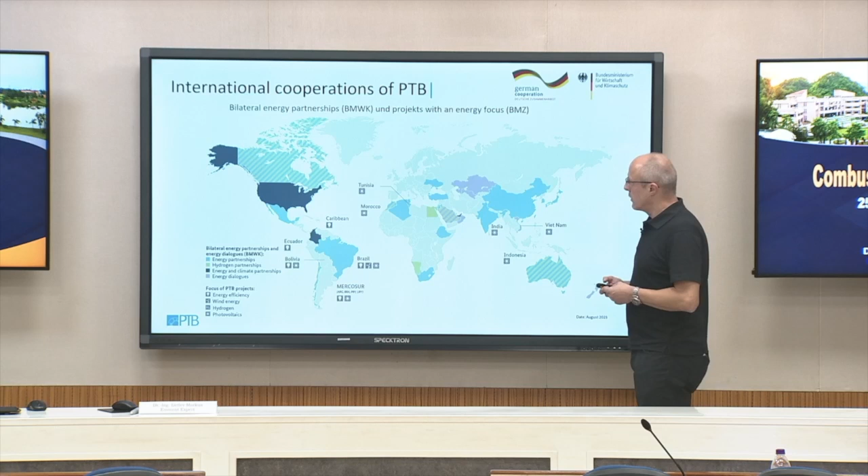So the PTB where I'm working is dealing here with different countries. We have energy partnerships from our Ministry of Economic Affairs, and we have projects with energy focus from our Ministry of Economic Cooperation. And so here we see India. There are PV projects, but in the future, hopefully, we will also have some projects with hydrogen.

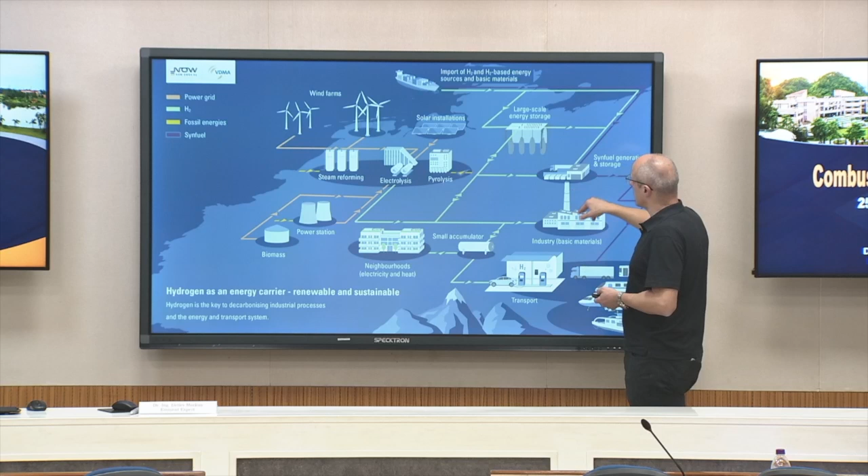So this is a beautiful future we are talking about. In Germany, some ships with green hydrogen, green ammonia, green methane come to our shores. The energy carrier is put into our system here. We produce locally some hydrogen and put it to the system. We use it in filling stations, we use it in industry. So everything looks quite nice and blue here. But of course, when you look into the details, you will see some problems here.